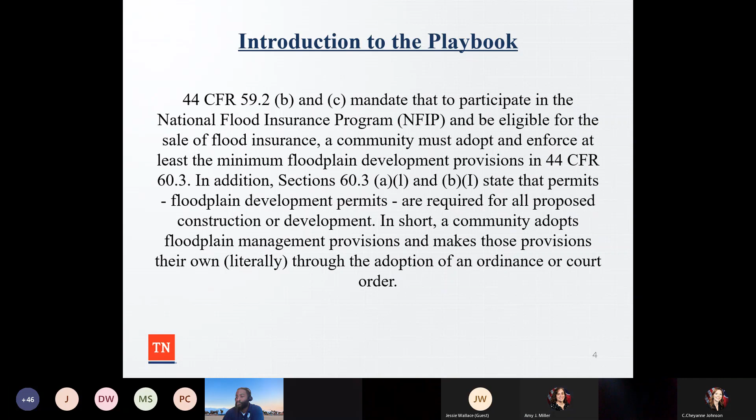The permitting playbook, we're really proud of this. We're going to make sure we revise it every year. We sent this out to four different communities prior to it being rolled out, and unfortunately no one gave any comments.

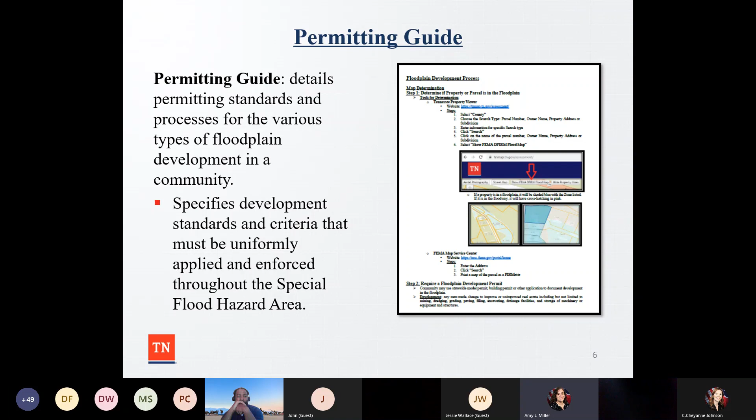As we go through this guide, you'll be able to see a starting point. When someone comes into your office and says, hey, I want to develop, you should be able to look at this permitting guide and make a determination if the property or proposed development is in a special flood hazard area.

One of the biggest things floodplain administrators need to do, probably the easiest starting point, is being able to determine if a parcel is in the floodplain, also known as a special flood hazard area.

As you can see from this image, this shaded parcel with a little circle area has floodplain on the parcel. One of the beautiful things we have here in Tennessee is parcel lines on our maps that can help you determine if a specific site is in a floodplain.

I've told this story a million times, but when I first started my planning career back home, one of the things I had to do was floodplain determinations, and I hated it because there weren't any parcel lines on the map. I had to sit there with a ruler and try to determine if a specific area was in a floodplain.

We are very blessed and fortunate in Tennessee to have those parcel lines, because we have the Tennessee Property Viewer, similar to this image on the screen taken from that website, which makes it easy for most counties, probably 75 out of the 95 counties that have this feature, to make a determination.

If you're one of the communities that isn't on the Tennessee Property Viewer, you have your own GIS website or your own GIS technician, who should have the National Flood Hazard Layer downloaded onto the website so that you can make a determination.

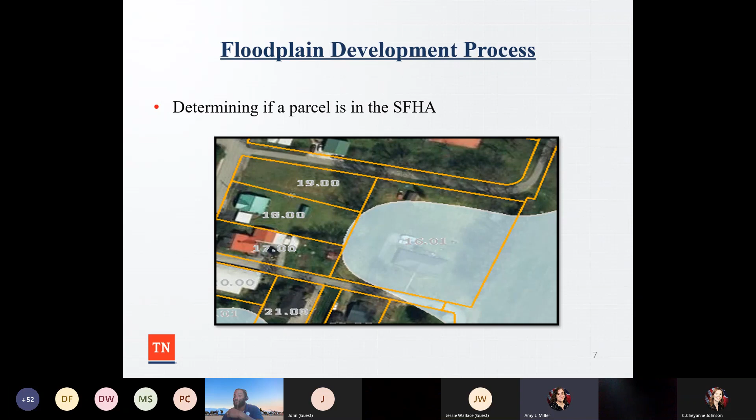So this kind of lays out the steps for the Tennessee Property Viewer. Most of you guys are already familiar with accessing the site.

You can just Google Tennessee Property Viewer, it'll pop up, and then you can use the search criteria to select the county, the search type, whether it be a parcel, owner name, property address, or subdivision. Then you enter that specific information, click search, and it's going to populate a map.

One thing you want to make sure you do is show the FEMA DFIRM flood map layer, so click on that. Now, because I use this website almost every day, sometimes it takes a moment for the flood layer to populate. So if you don't have a lot of patience, you may want to just wait. Sometimes various search engines, whether Google or Chrome, may take a moment, so you may have to switch and wait for it to populate.

This is another schematic to show if the property is in a floodplain. As I talked about a moment ago, if it's shaded, you can identify the parcel. On the left-hand side here, you can see parcel 4 is in a floodplain, in a shaded Zone A area.

On the right-hand side, Julius affectionately calls the floodway a candy cane, but I'm not sure that's necessarily a sweet treat for people, since it actually delineates a high flood risk hazard area. Again, you can look at various parcels, hit the identify button, and have it highlighted to show if it's in the floodplain or floodway.

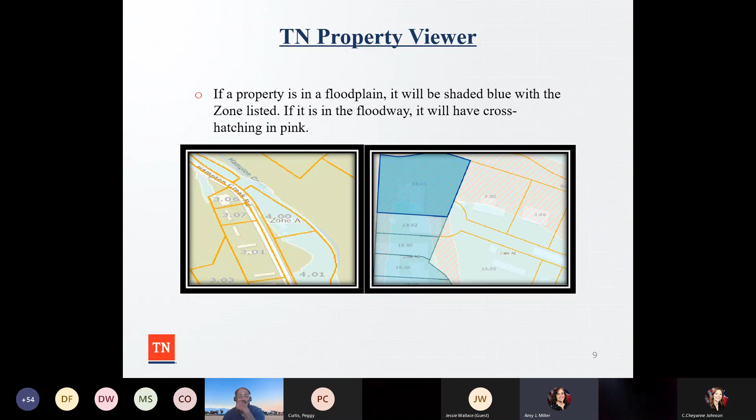You can also turn on the T-DOT imagery so you can see the house exactly and get a greater level of detail. We just wanted to show it simplistically on this image.

The next website that a lot of folks use is the FEMA Map Service Center website. You can just Google FEMA MSC for Map Service Center, and you can go in there anytime, day or night, type in an address, and it will show you whether or not there's floodplain in the area.

Again, you type in the address, or you can see where it says enter address, a place, or longitude, latitude coordinates. Enter that information, hit the search button, and it'll populate an image for you. You can also print a map of the parcel in FIRMette format.

Essentially, every community that participates in the National Flood Insurance Program gets flood insurance rate maps and a flood insurance study. What's really great about this website is if you want to do a floodplain determination, you can also get a FIRMette, which is actually just a specialized map of a specific address, parcel, structure, or area. You can get a smaller, condensed map to show if an area is in the special flood hazard area.

A lot of times, when we're doing audits or community assistance visits, we want to see that the community has done this determination. Julius and I have done a couple CAVs together, and sometimes we see it, sometimes we don't. So that's one way. If you're a floodplain administrator, you have these two great websites you can go to, type in the information, and make a determination pretty easily.

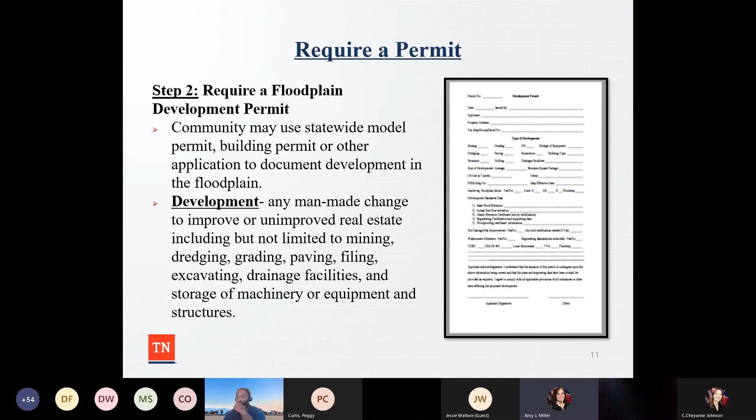So we're talking about site plans, delineating the floodplain. This is one thing we need to strengthen statewide, because a lot of times people arbitrarily draw the floodplain on the map, or there's just a little squiggly line or a dash to say where it's at, but it's not drawn all the way on a site plan.

So when you're working with surveyors, some of you may want to require that they download the National Flood Hazard Layer on their GIS, so when they're doing a site plan, that is actually drawn on there correctly. And some of you that have local GIS technicians in your community may want to talk to them to say, hey, have you downloaded the National Flood Hazard Layer on our GIS server?

So you can go under the FEMA Map Service Center website. You can click search all products, enter the state of Tennessee, the county your community is located in, the community name, and you have these drop downs, so it's not hard. You click search, and then under Effective Products, as you can see from the screenshot, you have the National Flood Hazard Layer as NFHL data county, and you're going to download that.

So this is one thing that when you're working with surveyors - a lot of you know your surveyors really well, some of you have 3 to 5 that submit everything in your community - but you want to make sure that they take the National Flood Hazard Layer and download that on their site plans, because a lot of them are not good. They're deficient. They're missing various pieces and parts.

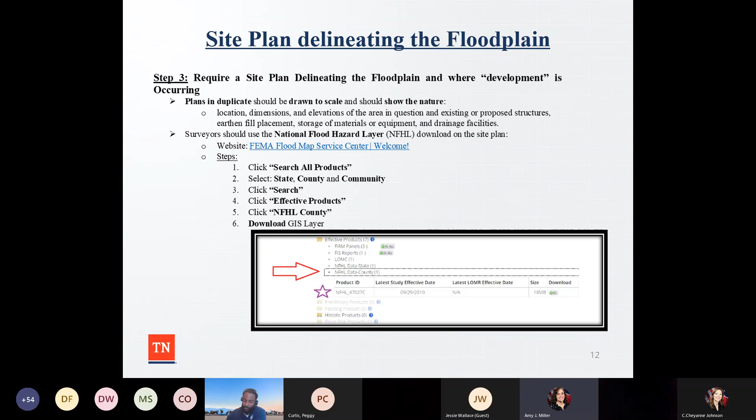So you can see here with the permitting guide, we actually have information for development standards. Because one thing, sometimes I quiz you guys.

One of my friends, who I'll leave nameless, texted me one time and said, hey Amy, I think it's a Zone A, they have to build 1 foot above the HAG. And I texted back and said, no, they have to build 3 feet above the HAG for a Zone A and 1 foot above the BFE in a Zone AE. So sometimes when you guys are asking questions, things get a little confused or twisted, not understanding the development standards.

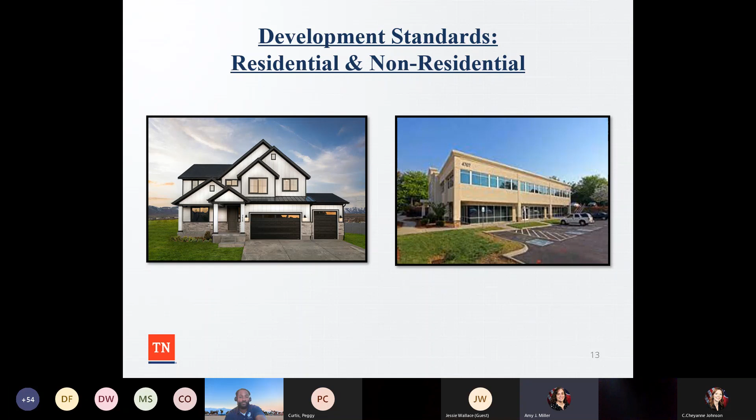So what we wanted to do in the playbook was, when you search through here and go to page 2, if you guys have printed out the permitting playbook, all these slides go through the whole document, from beginning to end.

After you see about having a site plan, you're going to see development standards for residential and non-residential. So if someone's coming in building a structure and you go, I don't remember what the standards are supposed to be for elevation, that's one of the first things you'll see. It's actually bolded for Zone A and Zone AE.

For Zone AE, the base flood elevation is derived from the flood insurance study profile. So we would like to see in the future that whenever we're looking at an elevation certificate, there's a flood insurance study profile attached that has the base flood elevation determined to 1/10 of a foot.

So if you have a permit tech reviewing the site plan once you get it, and building inspectors going out to look at construction as it's underway, making sure everybody understands the rules for elevation would be awesome. If you're new to this permitting guide, right off the bat it's going to tell you exactly what you need to know.

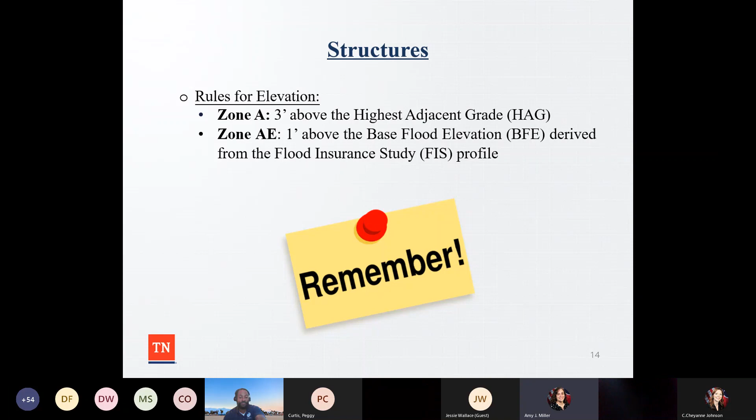Crawl space construction. A lot of structures in Tennessee have a crawl space. If you have footers below the base flood elevation, you can determine this by looking at the elevation certificate. Look at B9 and then C2A to see what those elevations are. If C2A's elevation is below B9, then the crawl space is going to need flood openings for the structure.

As we've talked about many times, remember this: for crawl space construction, we're going to have 1 square inch of vents per 1 square foot of living space. So if you're looking at an elevation certificate and it's a diagram 8 or diagram 9, and let's say you have a 1,500 square foot home, you want 1,500 square inches of vents.

The foundation openings, also known as flood vents, have to be automatic openings and not need human intervention. So if somebody says they want to use a garage door, or the door they go in and out of the garage, that requires human intervention to open it, whether with a garage door opener or by hand. That doesn't count as openings.

You want to make sure they have automatic openings, and they need to be within 1 foot of the natural grade, either interior or exterior. In the comment section, section D of the elevation certificate, there should be information about that in case you don't know, or if you walk up to the structure and it looks too high, it may be the interior grade. You want that noted on the elevation certificate.

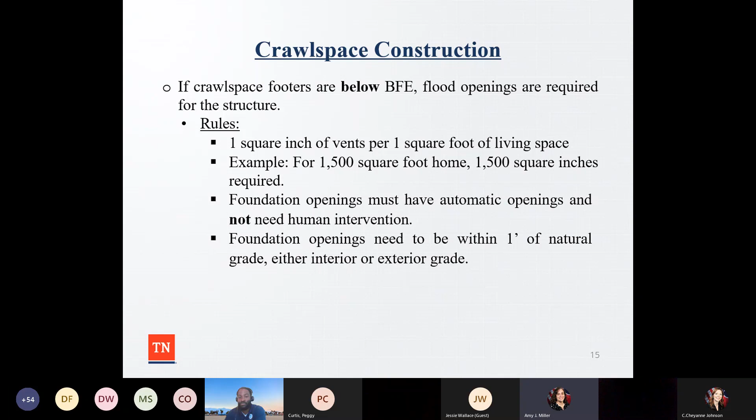Improvements to the structure, substantial damage and substantial improvement, and having cost estimates. A lot of times when we're doing audits and looking at documentation, there may be an addition to a structure. One thing we'd like to start seeing is the SDSI cost estimate sheets.

Normally whenever I come to visit, I always like to bring gifts. Sometimes I bring a lot of floodplain stuff, or like if I go visit Mike Hughes I bring him cookies and brownies, sometimes I bring gifts, right?

So the one thing that we would like to see more of is that if someone is doing an addition to a structure, an improvement, that there's an itemized cost of materials, labor, and estimates of those materials and labor. You can't just go based upon the building code, where it has, let's say, $97 a square foot. You can't just look at that and say, well, they're doing 200 feet of addition, so I'm just going to multiply that by 97 and that's how much it's going to cost.

That doesn't work. So you want to make sure that you're passing out that substantial damage, substantial improvement cost estimate sheet to make sure that you're detailing all the various things, because it can be cabinets, flooring, light fixtures, all sorts of things that maybe you wouldn't necessarily think of right off the bat.

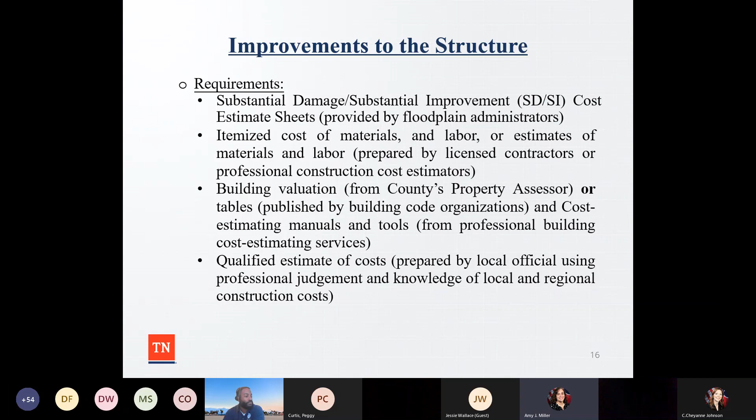You can get a qualified estimate of cost prepared by a local official using professional judgment. But again, you want to be careful on that as well, because some people may not like what you're doing. So my recommendation would be to use kind of like a building valuation from the county assessor, because they have to do every single property in the community.

So again, having the cost estimate sheets and making sure that they're reviewed versus the structure's fair market value. So you're going to review how much the cost estimates are going to be for the addition, if it's improvement, or if it's for damage, versus the fair market value.

If the cost of the improvements is under 50% of the fair market value, you can issue a floodplain development permit and allow for construction. If the cost improvements is over 50% of the fair market value, the floodplain administrator is going to document that the structure must be brought up into compliance.

So if it has to be brought up into compliance, the finished floor of the entire structure has to be elevated 1 foot above the base flood elevation for zone AE, and then 3 feet above the highest adjacent grade if it's in a zone A. If it's a non-residential structure and it's a substantial improvement, you can do floodproofing. But if it's residential, it has to be brought up into compliance.

So it does, again, making sure that you have all your I's dotted and T's crossed. One time there was a community that had a business that was going to do an improvement, and they were trying to use the insurance evaluation of the building instead of looking at the fair market value. So sometimes you have to look at the paperwork, because people will try to submit something that isn't necessarily the standardized way that you should be looking at it. And so they were trying to get out of doing this, or they're trying to get out of floodproofing the building, but unfortunately their cost estimate was over 50%. So they had to floodproof the building and they were not happy.

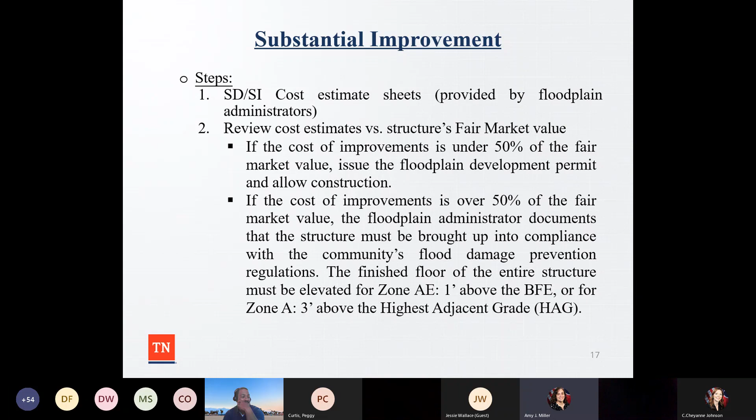So again, substantial damage. As Amanda Height or Larry LaScure can tell you, doing substantial damage for a floodplain administrator, there has to be a procedure for that. So again, you want to visit the structure and use a substantial damage estimator software or a spreadsheet to document the damages. A few months ago, Julius did a tremendous webinar on substantial damage estimator software and using the spreadsheet. So if you guys don't have that, send us an email, we'll send it to you again. But it can help you calculate the damage.

And then as a community floodplain administrator, you're going to write a letter to the homeowner to say either the structure was substantially damaged or it was not.

If it's under 50% of the structure's value that was damaged, it can be fixed to correct the structural and interior damage. If it's over 50% of the structure's fair market value and it's substantially damaged, it has to be brought up into compliance with the community's flood damage prevention regulations for new construction.

New construction, a lot of times we get questions about that. That is when it's commenced on or after the effective date of the initial floodplain management ordinance, and includes any subsequent improvements to the structure.

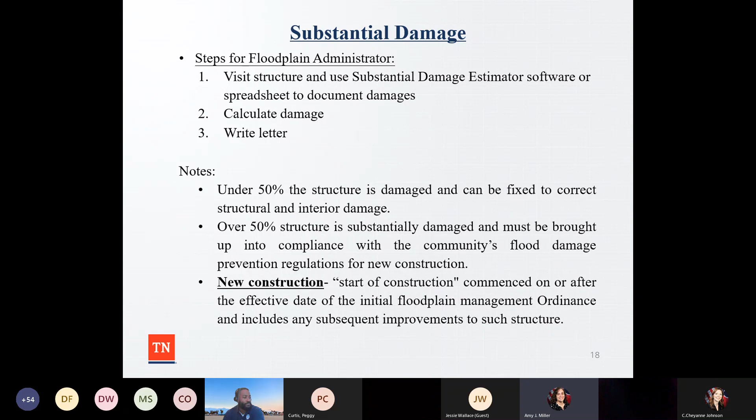Utilities. We were going through this PowerPoint yesterday, and Julius is very familiar with these air conditioning units, as he had this in Philadelphia on his house.

For utilities, you want to make sure that all electrical, heating, ventilation, plumbing, air conditioning equipment, and other service facilities are designed and located to prevent water from entering or accumulating within the components during conditions of flooding. You want to make sure they're elevated 1 foot above the base flood elevation in Zone AE, or if they're in Zone A, that they're elevated 3 feet above the highest adjacent grade.

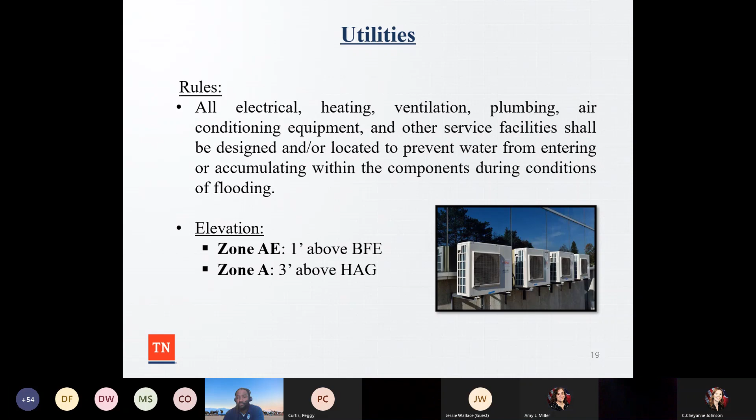New and replacement water supply systems have to be designed to minimize infiltration of floodwaters. The same with sanitary sewage systems.

For on-site waste disposal systems, they should be located and constructed to avoid impairment to them or contamination from them during flooding. That's where a site plan is really crucial, to be able to see where your water supply, your sanitary sewage, and your on-site waste disposal systems are going to be located, and try to keep them out of the floodplain if at all possible.

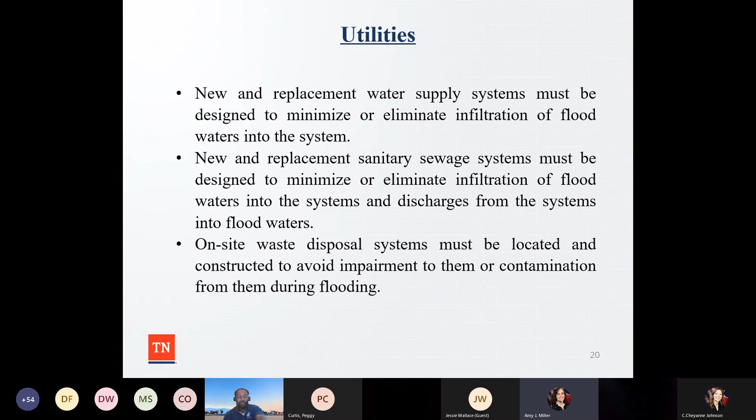Stream alterations, one of my favorite things to talk about. If there's a stream alteration in your community, whether it's a private citizen doing something, your local government with a project, or another grant applicant doing something along a stream, you want to make sure that you notify me prior to any alteration or relocation. Then you're also going to want to submit that relocation and alteration to FEMA within 6 months to ensure that the community flood insurance rate maps are revised through the letter of map revision process.

We've had issues in the past where folks have been a little argumentative about what is an alteration, what is a relocation. But if someone is doing a project, make sure that you go out, first of all, look at the site plan to see if it's being altered, go out and do a site visit, and make sure that your maps are revised.

Because if you don't revise your maps, you could decrease someone's flood risk and increase someone else's. So you want to make sure that your flood insurance rate maps are revised over time so that you have a true and accurate picture of the flood risk in your community.

You also want to make sure that whenever there's an alteration of the stream, the flood carrying capacity is going to be maintained.

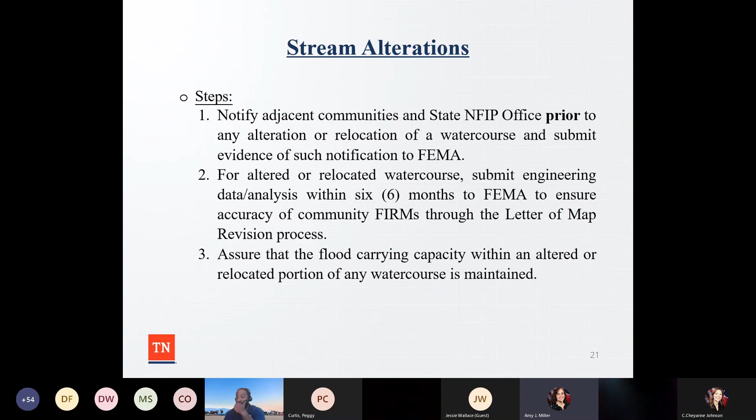So for Zone A, we start to look at floodplain regulations. If you have a large lot subdivision with new proposals greater than 50 lots or 5 acres, whichever is the lesser, it has to include base flood elevation data. So if I have a 100-acre farm in Zone A, and Cheyanne buys it and is going to have a major subdivision, she'll have to hire an engineer to complete a hydrologic analysis to determine the base flood elevation for those lots. The analysis must be reviewed by the state NFIP office for compliance with standard engineering practice. A lot of times I've had calls in the past where someone was going to do 50 lots in Zone A, and I said, you've got to have a BFE derived by an engineer, and I never heard if that actually happened.

So in some places in Tennessee that are rural but becoming more urbanized, this will continue to be an issue. If you have a Zone A parcel and they're doing 50 lots or 5 acres, whichever is the lesser, you want to make sure that BFE is determined. If you need help, or if you get documentation, make sure it's reviewed for compliance, because if it isn't and someone just gives you something you're not sure about, and those structures ever flood in the future, the community may get questions about why a house flooded and whether it was done correctly. So make sure everything you do is in compliance so it doesn't come back to haunt you.

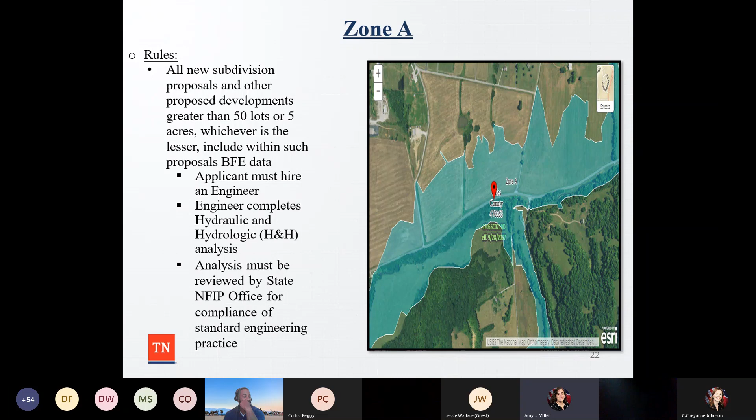So for manufactured homes, Julius and I were doing a CAV, was it last week? The time is flying by. But anyway, we were together last week out at a manufactured home site.

Julius was amazing because we were out there driving around and he noticed this manufactured home was on dry stack, not anchored, and didn't have the tie-down frames. We had examples where manufactured homes weren't anchored to prevent flotation, collapse, and lateral movement. So that's one thing you want to make sure of when you have a manufactured home, also known as a mobile home, in your community — that it's anchored to resist flotation, collapse, and lateral movement. Also make sure the lowest floor of the manufactured home in Zone AE is elevated on a permanent foundation to no lower than 1 foot above the base flood elevation. For Zone A without a BFE, make sure the manufactured home chassis is elevated, supported, and reinforced by piers or other foundation elements of at least equivalent strength, at least 3 feet in height above the highest adjacent grade.

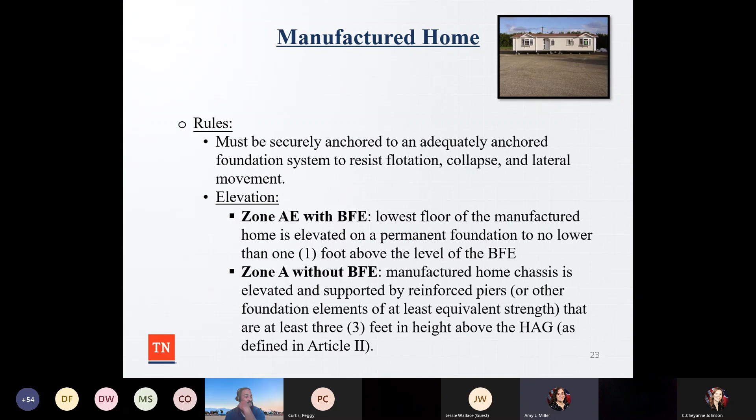So again, these are just some standards we have for various types of development. When you're looking at this permitting guide, if you have questions about a manufactured home, it's listed. The next one we're going to talk about is a recreational vehicle — we have questions about this.

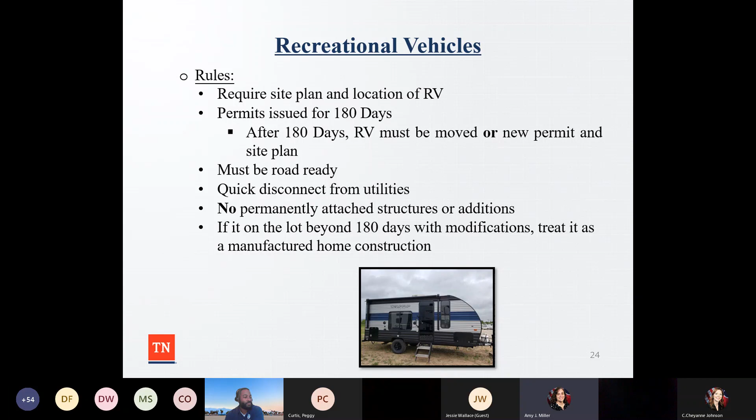If it's a recreational vehicle in a special flood hazard area, make sure there's a site plan showing where the recreational vehicle will be located. A permit should be issued for 180 days, and after that, the recreational vehicle must be moved or a new permit and site plan submitted. The recreational vehicle should be road ready, with quick disconnect from utilities, so if there's a flood event, you can disconnect and haul it off site. It shouldn't have a flat tire or sit there forever, and should not have any permanently attached structure or additions. When we were out doing our CAV together, we saw a recreational vehicle that had a porch on the back where someone was living permanently. If it's on the lot beyond 180 days with modifications, you should treat it as manufactured home construction.

Floodway and stream development—we've talked a lot about this. We're going to be having another session in November, which will probably be well attended by a lot of engineers since there are still a lot of questions on this. So if you have a stream, a floodway on a lot, even an unmapped stream, and there's any kind of fill, new construction like a bridge, substantial improvement, a structure, or other development within an adopted floodway or stream buffer area, it's going to trigger an engineering analysis.

The first thing that should happen is the engineer should request a HEC-RAS model from the FEMA engineering library. Unfortunately, I don't have the software or the time to do it for the various requests, so it really should go through FEMA because FEMA is a clearinghouse—kind of like the card catalog or the library that has all those models. So you make a request and ask for the HEC-RAS model. It can take 6 to 8 weeks to obtain the modeling.

So again, people need to be patient. I love the people who'll submit something on Thursday and then email me on Monday asking why they don't have it already. Patience, right?

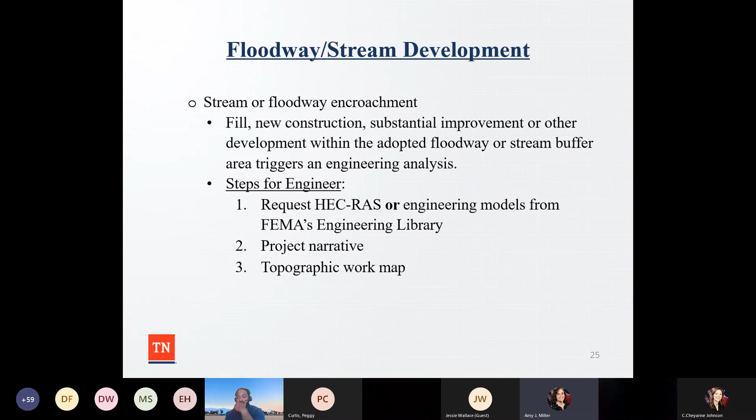You need a project narrative—the who, what, where, when, why of what's being proposed at the site—a topographic work map, and the engineering model. A lot of you guys giggle because when we talk about stream encroachments, we use the pecan pie analogy to make sure you have all 5 models: the effective and the duplicate effective. What FEMA gives you is the effective; you try to duplicate it on your computer, and that's the duplicate effective.

The corrected effective is any kind of non-man-made changes, like if you're going to use LiDAR. Then you have existing conditions, which is what's already there within the project area, and then what you're proposing to do at the site. If you want to hit a home run or score a touchdown with all 5 of those models, you have to have no rise—no changes in the base flood elevation, floodway width, or base flood discharge. Very hard to do. Then there are cross-section plots so that when looking at a study area, you can show the base flood elevation if there are any changes.

Then you have a property survey and an as-built certification—so if you're building a bridge, the engineer has to sign off certifying it. And if there are changes to development along a stream, again asking for permission, you have to submit a conditional letter of map revision stating what you're proposing to do. It has to be within 1 foot, because if it's 1 foot or greater and there are any insurable properties nearby, FEMA will deny the project. Notice I said FEMA will deny the project.

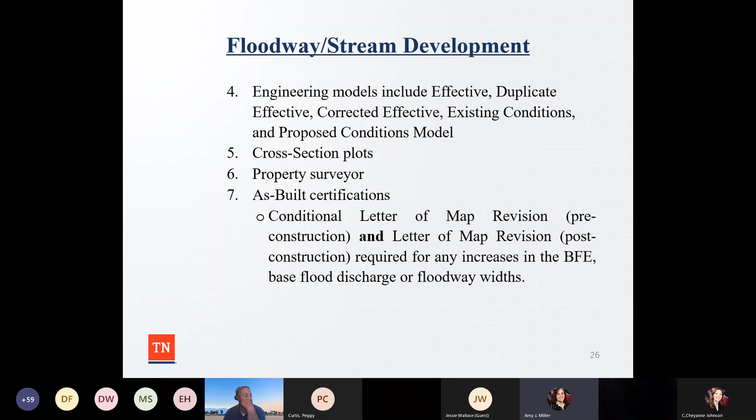Shaded zone X has become an issue we've had a lot of questions about. Again, as we talked about at the beginning of this webinar, you want to make sure you require a site plan to ensure the structure or development is in the shaded zone X area from the national flood hazard layer. If it is confirmed that it is entirely in the shaded zone X area, it doesn't fall under the NFIP regulations. Let me say that again—if it is completely in shaded zone X, it doesn't fall under the NFIP regulations.

So if the structure or any non-structural development is in a shaded zone X or in a zone X, an elevation certificate is not required.

We've had several communities requiring elevation certificates for zone X. That is not correct. You're essentially asking folks to do something that is not required. You're going beyond your scope of written regulations.

So unless you have it adopted and written in your regulations requiring it, you shouldn't be doing it. Adding to what Amy just alluded to, we have seen this issue in numerous communities, we have done audits and CAVs recently. Amy and I always tell communities, we'll always defend you, we'll always support you as long as you're enforcing your regulations. But if you're enforcing stuff that's not in your regulations, it's not possible for us to provide you support.

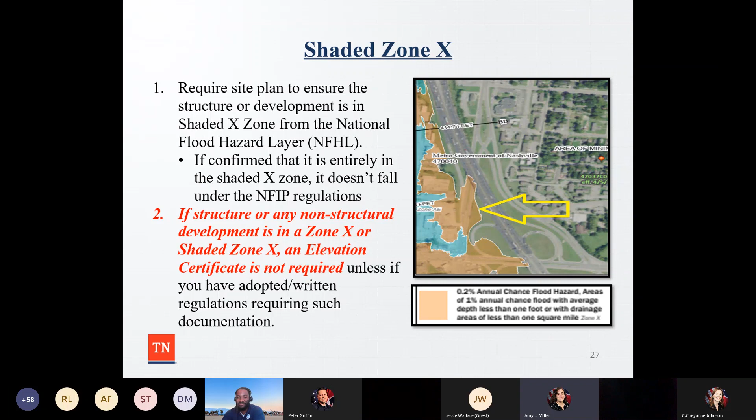So, all right, the sample permit. This is an example of, you guys saw earlier in the presentation, the Word document of the floodplain development permit. So Julius, being amazing as he is, said, hey Aim, we need to have a fillable PDF for communities. So if you guys are looking at the permitting guide, there's actually a fillable PDF that you can use for your community.

So if you want to be a little bit more high tech, a little bit flashier, there's a sample permit, a PDF that's fillable. If you're more like a dinosaur like me and you just like that Word document, you can do that. But again, the sample permit is really a comprehensive application that details the nature, location, and type of development within the special flood hazard area.

So other human activities that are considered development include, but are not limited to, alterations of a structure through additions, demolition, remodeling, fences. Fences should be as part of the permit, retaining wall, moving, placement of remanufactured mobile homes, campgrounds, storage of machinery, equipment, such as vehicles and materials. So like if you have a storage yard or a salvage yard.

So, you know, if you guys haven't had time to really sit down and look at the sample permit, I would really encourage you to look at it after this training so that you can become familiar with it. It's very detailed. For some of you guys it will be like, wow, I never ever thought that there was so much to it. But there really is.

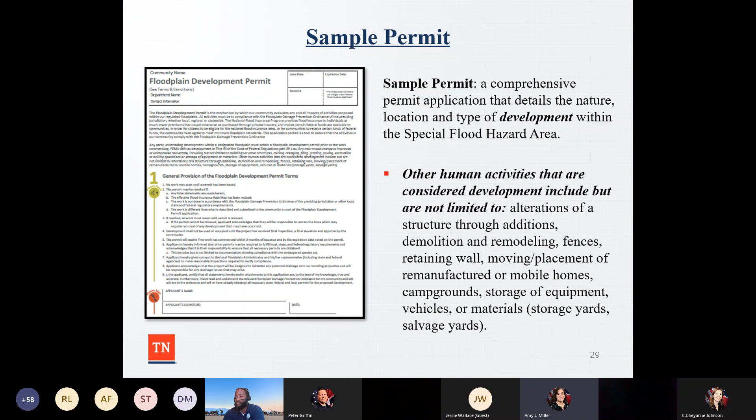We tried to break this down into more manageable steps, so some of you don't feel so overwhelmed or have that anxiety kick up a hundred-fold. We just wanted to have all this stuff together to make sure it's easy.

Also, when Amy, Cheyenne, and I were creating the permitting guide for local communities, we understood some folks like things fillable if they have an iPad or laptop, while others want to print it out and have it in hand. So the sample permit in the fillable PDF is comprehensive—about five pages long—but it walks you through, especially for an applicant, to understand what the community regulation is. Any of the documents we're giving you, feel free to add your community logos and modify them for your community. This is just a baseline, a foundational piece for you to build off of.

If you like it, use it as is. If you want to make modifications to be more reflective of your community and standards, or add logos or any additional touch to make it unique to your community, go ahead—it's your documentation, it's your permitting guide. Make changes to it. All Amy, Cheyenne, and I are trying to do is give every community the same baseline for floodplain management in Tennessee.

So moving forward, there won't be any more excuses like 'I don't have a permitting guide, I don't know what to do.' We want to create one standard for all our communities, and your communities are able to modify it since we know every community has different higher standards. Just modify those documents, but it's your document, so take ownership of it.

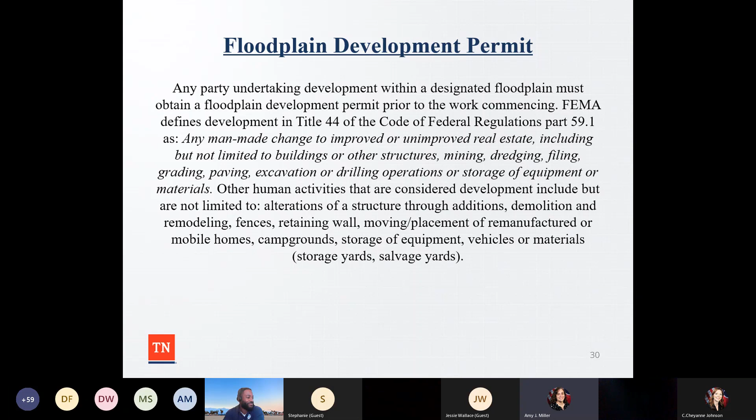We want to make sure you guys have the tools in your toolbox to help folks when they're developing in the floodplain. So we also have a permit review. It's great to have a permit to say okay, the who, what, when, where, why - that's great, right? But then once you start to have development, what else do I need to review? What do they need to give me? How do I get this administrative process together? How do I tackle this? That's the next question, right?

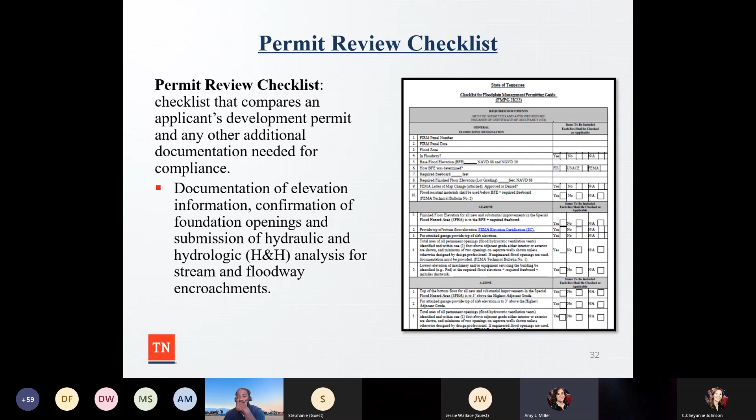So once you go through the permit application, the next thing we did, that Julius did a great job helping with, was having a permit review checklist. It compares the applicant development permit and any additional documentation needed for compliance. Just because someone's proposing to do something, you need documentation, verification, confirmation that what they say they're going to do, they actually did. So you have this permitting guide checklist to make sure you have the general information needed to confirm the development is in compliance. We're going to go through each section so you guys can see it, hit some of the high points, and continue on with other elements of the permitting playbook.

The first part of this section is talking about general flood zone designation - essentially the where. What firm panel number? What's the date of the firm panel? What flood zone am I in? Am I in a floodway? What's the base flood elevation? What vertical datum is it under? Whether it's North American Vertical Datum 88, or National Geodetic Vertical Datum 29, you need to make sure you know which one is for your flood insurance rate map. It has it under the notes to users, or under one other section on the map - I can't remember right now, hopefully it'll come to me. But make sure that vertical datum is the same as the flood insurance rate map.

How is a BFE determined? Notice we have the FIS, the Army Corps, or FEMA - it should not be marked firm. So if you get an elevation certificate marked firm, and I'm looking at this checklist to make sure things are compliant, that should be a huge red flag that they didn't determine that base flood elevation correctly for a zone AE.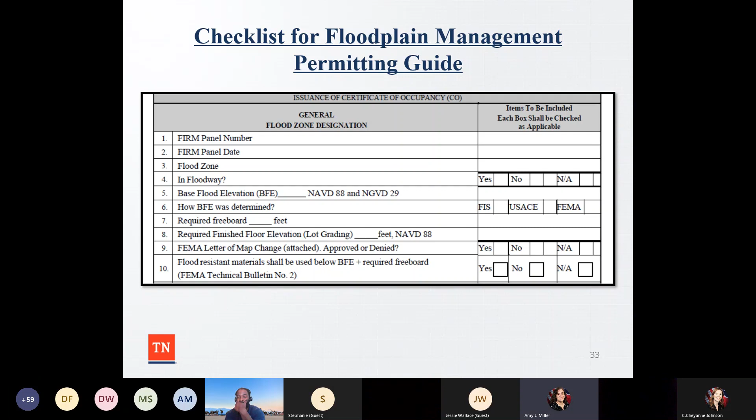And then what's your required freeboard? Most of you guys have 1 foot - if you're Metro Nashville, you're going to have 4 feet. Make sure you have the required finished floor elevation for lot grading, and if there's any letter of map changes, whether approved or denied. And then if there's any flood resistant materials used below the BFE and the required freeboard - so if you're floodproofing a structure, you would have information there.

For zone AE, we've broken this down a bit based upon what zone we're talking about. If it's a zone AE or a zone A, there are certain elements that should be part of the permitting review.

So again, is my finished floor elevation for all new and substantial improvements in the special flood hazard area to the base flood elevation plus the required freeboard? If I'm looking at the elevation certificate, at B9, what's my BFE? And at C2A, what's my finished floor elevation? You look at it to see, does it meet the required top and bottom floor elevations.

Do I have my elevation certificate? Is it a finished construction elevation certificate? Some of you have regulations where you require an under construction elevation certificate as well as a finished construction elevation certificate. What all documentation do you have?

You should not be issuing a certificate of occupancy if it's for under construction. When we've been doing audits, we've seen elevation certificates for construction drawings. People are just accepting whatever and not looking at it. That's a problem. So with this permitting guide, this review checklist, you want to make sure the elevation certificate is completed and that it's for finished construction.

Another pet peeve, don't write on it. We've seen people write on it lately. I had someone joke with me the other day about how they sent an elevation certificate that was completed to a property owner, and in the email said, 'Amy, don't have a heart attack because I wrote on it.' So she passed that along to the applicant as a reminder.

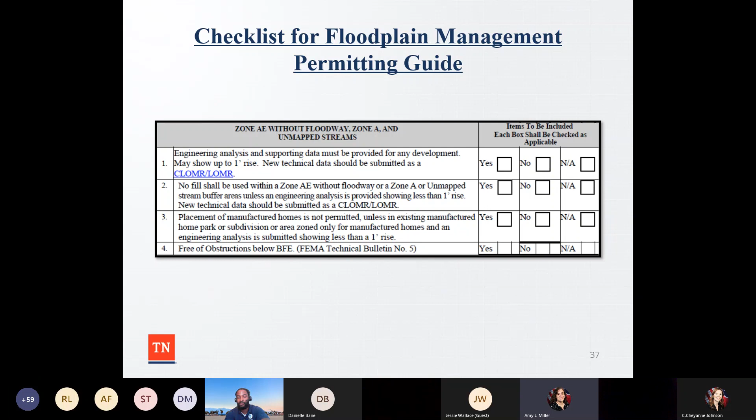If there are changes in the modeling of the base flood elevation, floodway widths, or base flood discharge, you have to submit to FEMA prior to development to get approval. Then once you construct it, within 6 months you're going to revise the flood insurance rate maps and the flood insurance study profile, so you have a more accurate depiction of your flood risk in the community and the data for future development.

For non-residential floodproofing of a structure in Zone A, a commercial structure - non-residential structures are the only type that can be flood-proofed. Commercial structures with the finished floor below the base flood elevation can be engineered to be flood-proofed 1 foot or greater above the base flood elevation, or elevated to the required flood elevation.

FEMA Technical Bulletin number 3 has a lot of information on how to do floodproofing. If you guys are super excited about floodproofing, next month we're going to be doing a webinar on it. For more information and assistance, make sure you have a floodproofing certificate required before the permit is finalized.

Again, you want to look to see if they're using flood resistant materials. How are they dealing with the hydrostatic and hydrodynamic forces? Is there a maintenance plan? You want to see all that information. They can't just sign off on that floodproofing certificate and say, yeah, we're going to do all this stuff without having documentation to go with it.

And again, if they're using flood protection and flood barriers, it has to be identified on the plans, and making sure there's operation procedures are required. Again, you don't want to wait until there's a flood event and go, oh, this is what I'm going to do. So then we have accessory structures for zone A.

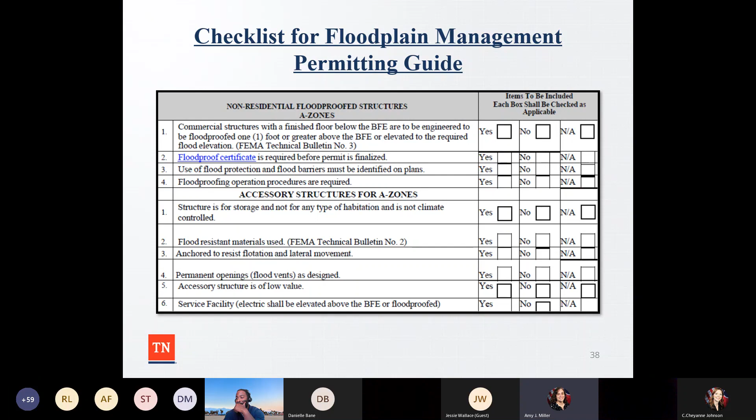So remodeling, as we talked about before, is it going to be a substantial improvement? Is it going to be 50% or greater than the fair market value? So again, it has to be any one or more combination of repair, reconstruction, rehabilitation, addition or improvement of a building, of the structure. And again, if it exceeds 50% of the fair market value, the structure has to be brought up into compliance.

And again, as we talked about before, having that SDSI cost estimate sheet, looking at the fair market value and then doing a little bit of math to see is it over 50% of the fair market value. So again, if you don't have all the pieces of the puzzle, if they're just coming in wanting to hurry up and do it, give them that sheet and say, I need some information from a reliable source, whether they're using a contractor or something, but it should be documented in all the various aspects. They can't come in and say, well, I'm just going to put a 100 square foot addition, just give me a permit. They need to explain everything that they're doing.

And again, making sure that you have a copy of a signed construction contract and making sure that it's uninhabited space. If the remodel is of uninhabited space to habitable space and it's below the base flood elevation, it is prohibited. Again, you want to make sure that it's above the base flood elevation.

A couple reasons. One, for flood insurance purposes, if it's below the BFE, they're going to get hammered on flood insurance rates. And then if it's below the BFE and they're going to be habitating it, like you guys could see in Chicago, they had that flood event over the weekend where they got 6 inches of water or 6 inches of rain. And then there was water in the basement, water in the houses, and people were panicking about it. Again, you want to make sure that you don't have that issue in your community where you have first responders having to go out and rescue people.

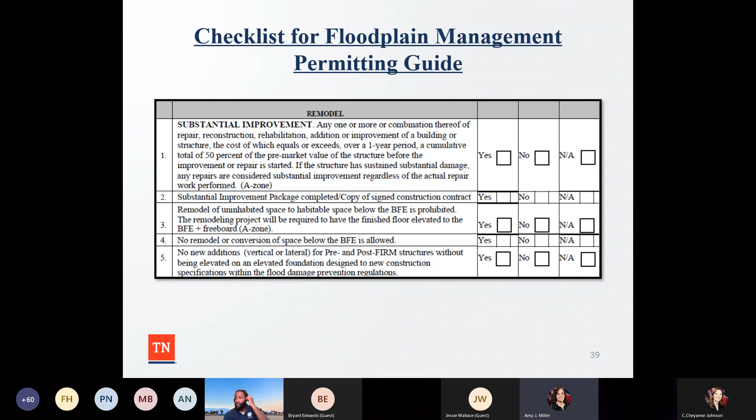Okay, so this next section is probably my favorite, because I sat down on a Monday night at home on the couch and got inspired and put this whole thing together. Some of you guys giggle because I think I have a reputation for whenever I review elevation certificates - people say 'oh, she's going to make it bleed' or 'she's going to find something wrong with it' or 'I got one, I'm not sure it's right, I'll just send it to Amy and she can review it.'

What's wonderful to me is that Cheyanne, now that she's been here long enough, knows how excited I get about reviewing elevation certificates, and she's caught the bug and enjoys reviewing them as well. Sometimes when we do an audit we'll go through all the documentation and see some of the errors on elevation certificates, so she's starting to see patterns of things going really well, things not going so well, and areas of improvement. So I'll admit, this is my favorite section.

I'll sit here and smile the whole time, because really this checklist is like if Amy Miller was sitting beside you. This is kind of my love letter for elevation certificate review. If you wanted me beside you, if you really wanted me to do it with you, this is as close as you're going to get - unless you call me and say 'Amy, I need help.' But if you can't get a hold of me, or you just want to try to get better at this and be more like Amy, here we go.

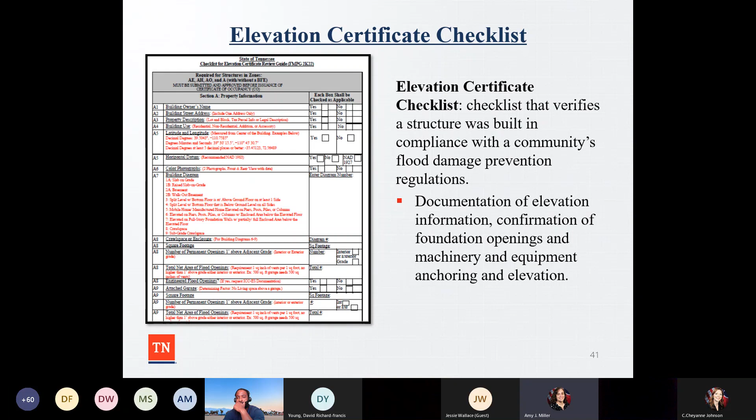So the elevation certificate, as Julius mentioned a few moments ago, with the link that's within the permitting guide, this is an example of what the elevation certificate looks like. You have the nice little cover page, and then it's a fillable PDF. We just did the first page so you guys could see it, but this is what you should be getting. As talked about a moment ago, it does expire, I believe, November 30th, 2022, but we will continue to use it until FEMA has a new certificate ready. Once it's going to be rolled out, we will let you know ahead of time so you can prepare for that.

So the elevation checklist, as you notice here, there's a lot of red. I felt like if I called out certain things for certain sections, it would be easier for you guys to remember when you're reviewing an elevation certificate, to make sure that it's compliant.

So the first thing is making sure that you have a building owner's name, pretty simple. And then you'll notice for A2 that it should be for one address only. When Julius and I were doing an audit, we were looking at some elevation certificates, and it would say 900 to 925, let's say Walnut Street. It should be for one address only, because for flood insurance purposes, they're looking at just that structure only.

So again, property description - making sure that you have the lot and block information, tax parcel info, or a legal description. There should be something in there, and it should be specific to that structure or parcel. Building use - there's 4 different kinds. A lot of times we see something where it'll say like hair salon or insurance agency or something, but you want to make sure that it's only the 4 types. It should say residential, non-residential, addition, or accessory. That's it. It really shouldn't be that hard, but people make it hard.

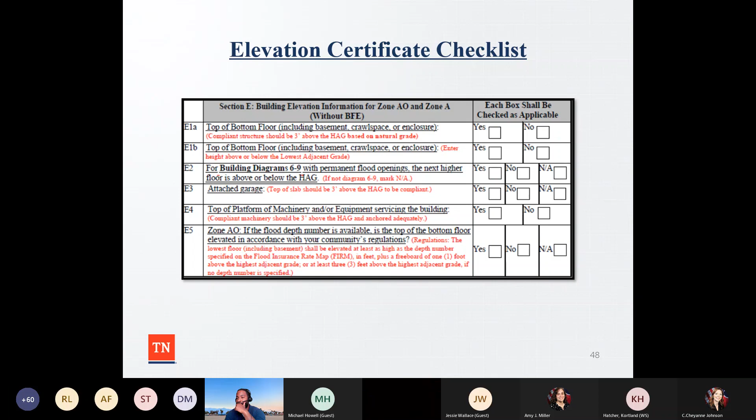So we have some notes. Number one, don't write on the document—it invalidates it. Elevation certificates should be typed, because if it's handwritten and sitting in the file folder for a long time, it tends to lose its integrity, and it's not always easily copied, or you can see what's going on.

An elevation certificate should be kept on file forever by the local community, in perpetuity. Once you get it, no matter what you get for floodplain management, all those documents are historical. Keep them in your file folder, don't throw them away. Like Julius said, all 6 pages should be submitted and included for full compliance.

The certificate of occupancy, if you have a building inspector and building codes, should be issued after the deficiencies or omissions are corrected. If the FIS profile is marked as a source of the base flood elevation, it should be attached. If you don't have it, ask for it. The firm is not to be used as the sole source of elevation information.

The firm is only used in coastal V zones. We don't have any coastal V zones in Tennessee—I had someone ask me that a couple weeks ago. Color photographs need a caption of the view and the date, and you should have at least 2. Pages 13 through 18 provide instructions on filling out the certificate correctly.

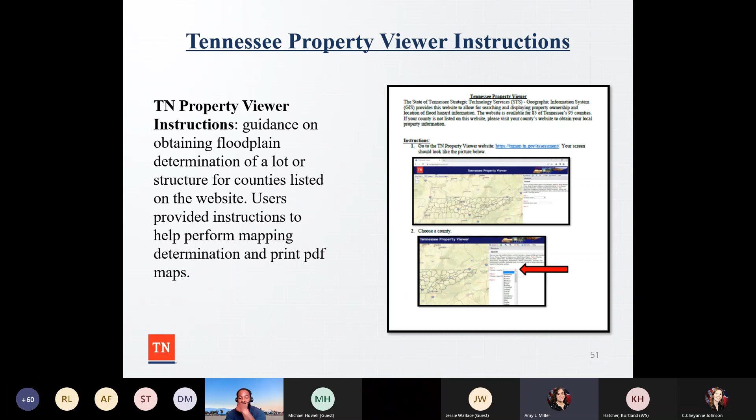So if you go on the Tennessee property viewer now and you want to print out a firm, you can print out one. Again, this just has a visual schematic of how to go to the website, how to choose the county, and then eventually, once you put in the search information, as we showed you earlier this morning.

If you have shaded areas on a parcel, you can zoom in and see this is zone A, or you can see over here on the right that there's a zone AE with floodway with the crosshatch, also known as candy cane in Julius Lockhart's world. I'm going to have candy canes when you come in December, I promise you.

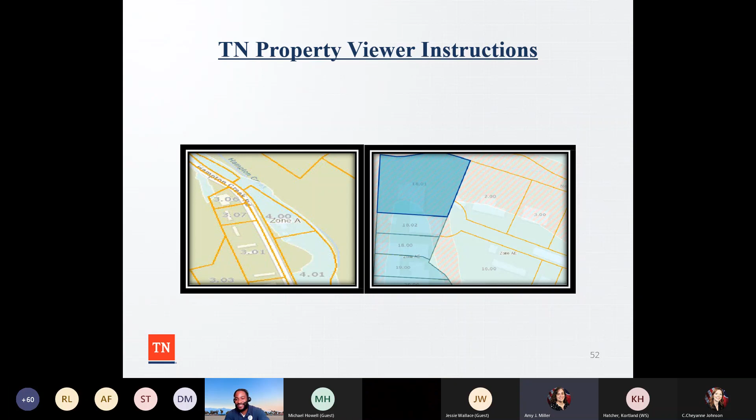This is what it looks like at the home page—you enter that information. Again, you can choose a county, you can choose a search type, just click on that little drop down and select parcel number, owner name, property address, or subdivision. So there's multiple ways that you can look at it.

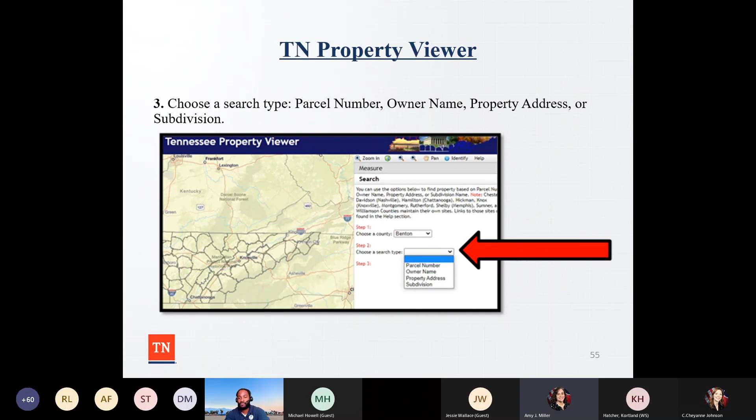And then there's further information that's going to be on here, as far as if you have, let's say, a county and you choose the owner name. Oh, wow—there really is a Cheyanne Johnson? Okay, well, all right. So you're going to enter that information in there, and then you're going to hit search.

So once you're going to be able to print out that PDF, we have some concluding thoughts for this.

Local floodplain administrator, you guys really are the star of the show, right? As I've said a million times, and will continue to say, you guys are the rock star of your local community when it comes to floodplain management. You're really where it's at. It's almost like we're playing tennis doubles, where you're out in front, and Julius and I are in the back to provide support. We're kind of like the backup dancers for the rock star show, right? Because you guys are at the front of the mic, singing, people love you, adore you. We're more in the background, just providing support when you need it.

So you want to make sure that when you're doing floodplain management, you really review and evaluate your development applications. Because if you don't review and evaluate them, if we come in to do an audit, or let's say God forbid there's a flood event, people are going to want to know what you have on file. A lot of communities are struggling with administrative procedures, so we're providing this playbook for you to have better administrative procedure, a solid starting point to look at this information and improve and enhance your local floodplain management program. You're going to determine if it's in a special flood hazard area. There are development standards written in this document that you can look at to make sure it's compliant. There are various development types there, so there's no excuse not to know what to do. And then you want to make sure that you review elevation certificates for accuracy.